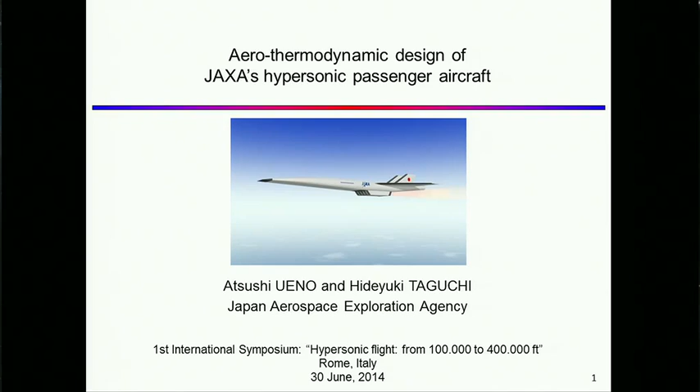Yes, thank you very much. Today I'd like to introduce the research activity at JAXA on hypersonic transport. In this presentation I will focus on aerothermodynamic design, and the Hikari project, a Europe-Japan collaboration, is briefly introduced.

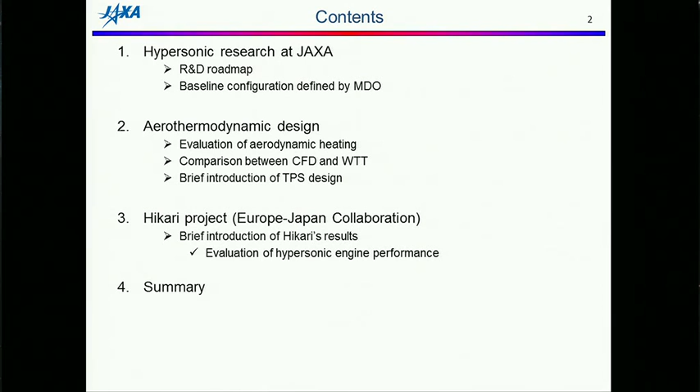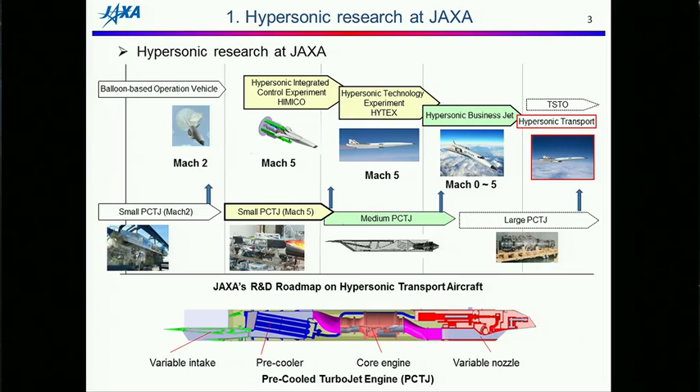After that, we are aiming at a hypersonic business jet using a medium-sized PCTJ, and finally we are aiming at a large-sized passenger aircraft. I will introduce this large-sized aircraft.

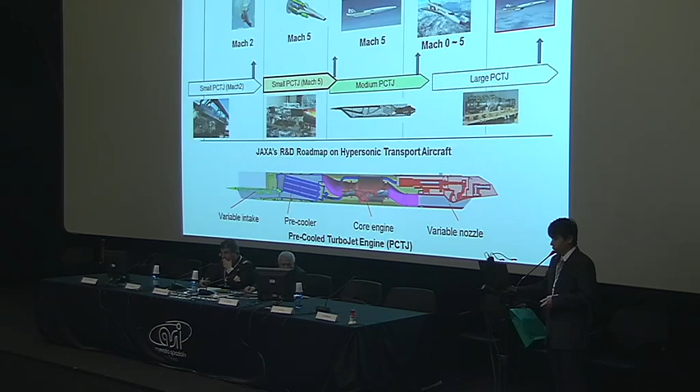The number of passengers is 100. Flight Mach number is 5 at an altitude of 25 kilometers. We are aiming at trans-Pacific flight from Tokyo to Los Angeles. It will take about 2 hours.

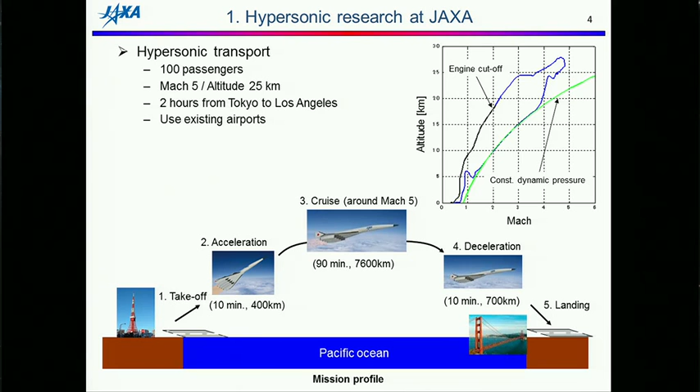Baseline configuration of our large-sized aircraft was defined using multidisciplinary design optimization. The aircraft shape and engine size were optimized considering mission requirements such as range performance and flight time. The optimized length is about 90 meters, and the weight is about 400 metric tons.

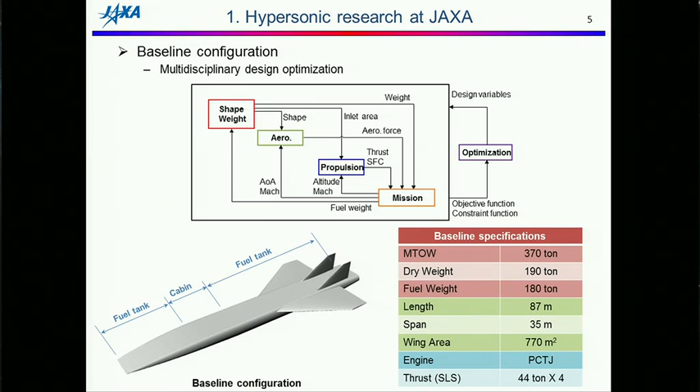We have 2 fuel tanks at the front and rear part of the fuselage in order to control the position of the center of gravity, and the cabin is placed at the center fuselage. For this baseline configuration, detailed aerothermodynamic design was conducted.

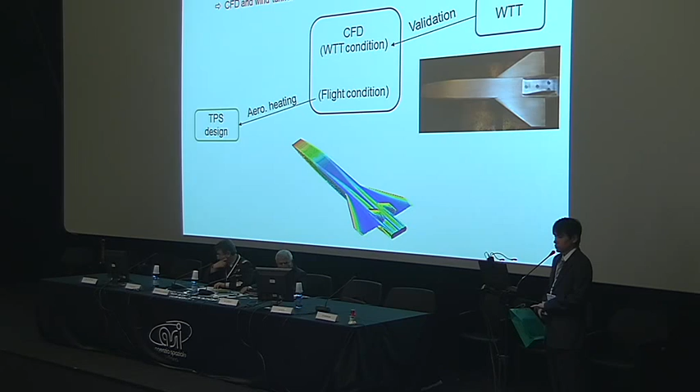In the MDO, aerodynamic heating was not taken into account, and the TPS weight was estimated using an empirical relation. Here, CFD analysis and wind tunnel tests were conducted to evaluate aerodynamic heating. In the wind tunnel test, it is difficult to realize flight condition because the Reynolds number is so large. So at first, CFD was validated by wind tunnel test, and after that, based on the CFD result at flight condition, the TPS was designed.

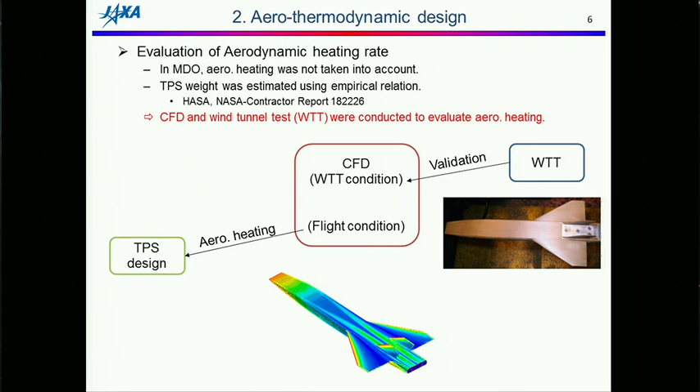The method of CFD analysis is shown here. JAXA's UPACS code was used, and the wall condition is isothermal wall. At wind tunnel condition, the wall temperature was set at around 300 Kelvin, considering the wall temperature of the wind tunnel model. At flight condition, the wall temperature was set at around 800 Kelvin, considering the usable temperature of the TPS material.

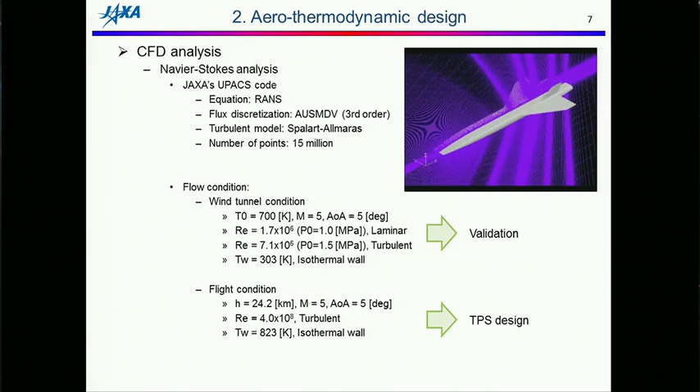The wind tunnel test was conducted at JAXA's hypersonic wind tunnel. The free stream Mach number is 5, the diameter of the test section is 0.5 meter, and the maximum duration is 120 seconds.

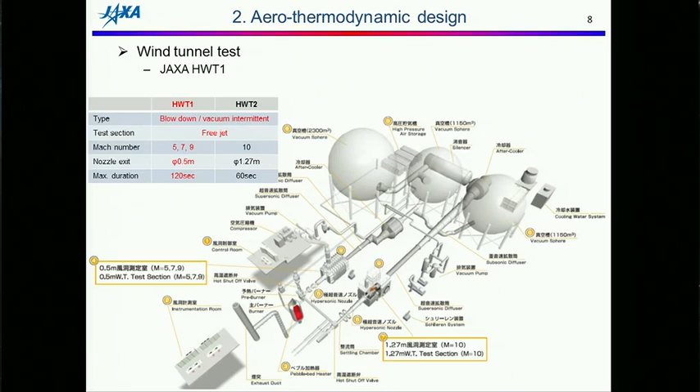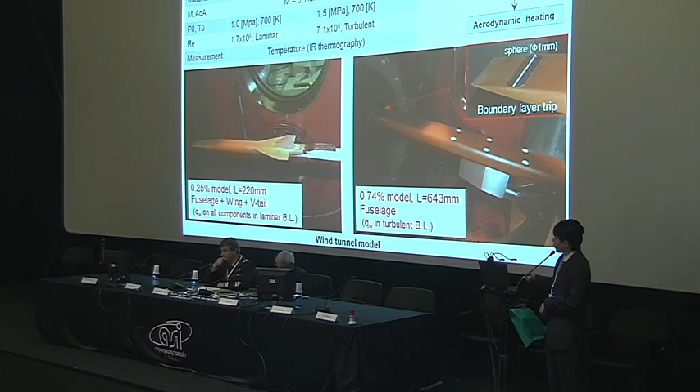We have 2 wind tunnel models. This smaller model is a full configuration model having a fuselage, wing, and vertical tail. The Reynolds number is less than the transition Reynolds number, and the boundary layer is laminar. But at flight condition, the boundary layer becomes turbulent, so we have to measure the aerodynamic heating for turbulent boundary layer.

So to increase the Reynolds number, in this large model the length is enlarged, and P0, the stagnation pressure, is increased from 1.0 to 1.5 megapascal. As a result, the Reynolds number becomes higher than the transition Reynolds number. In addition, in this model, a boundary layer trip was attached around the nose. In this test, the temperature was measured by infrared thermography, and assuming a semi-infinite one-dimensional heat equation, the aerodynamic heating was evaluated.

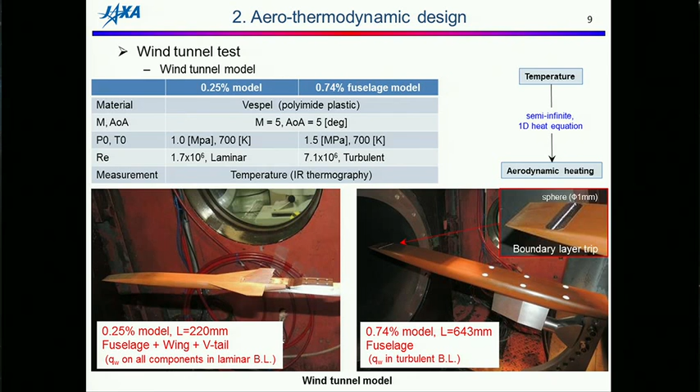This figure shows the result of a wind tunnel test for the smaller model. The boundary layer is laminar. The left figure shows the aerodynamic heating on the upper surface of the model.

Here we can see high aerodynamic heating. This is due to the vortex. The flow is separated at the side edge of the fuselage, and a vortex is generated on the upper surface of the model. This vortex thins the boundary layer thickness, so the aerodynamic heating is increased in the region where this vortex is attached.

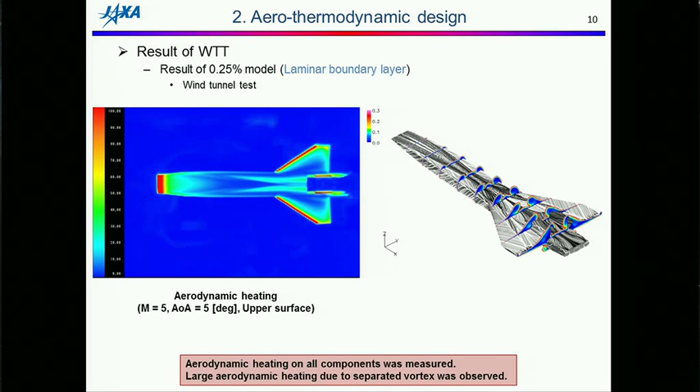This figure shows a comparison between CFD analysis and the wind tunnel test. They show a qualitative agreement. However, in the wind tunnel test, the aerodynamic heating is slightly overestimated around the nose and around the wing leading edge. This is due to the thickness of the wind tunnel model.

When the thickness of the wind tunnel model is small, it becomes difficult to distinguish between heating on the upper surface and heating on the lower surface. So this assumption, the semi-infinite one-dimensional heat equation, is not correct. So the aerodynamic heating is slightly overestimated in the region where the wind tunnel thickness is small. But CFD and wind tunnel test show a qualitative agreement.

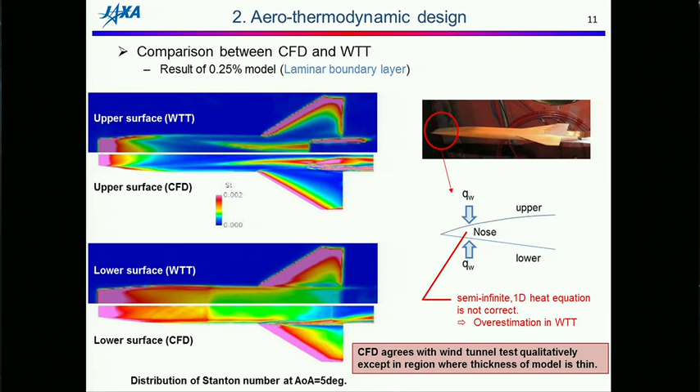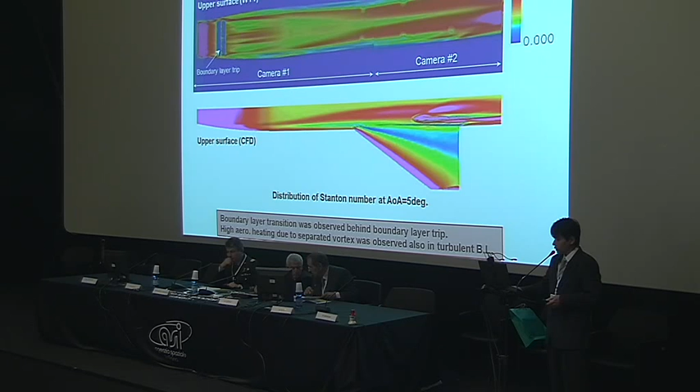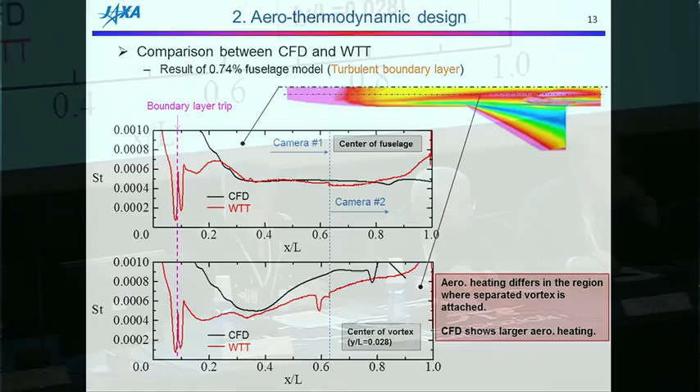In the region of the boundary layer trip, the boundary layer is laminar, and aerodynamic heating is lower than that of the CFD analysis. But behind the boundary layer trip, the boundary layer becomes turbulent, and aerodynamic heating shows good agreement with the CFD analysis.

However, along this line, CFD shows slightly larger aerodynamic heating. We think this is due to the vortex. From this figure, the vortex seems to be diffused more widely compared to that of CFD, and this difference in the diffusion of the vortex may affect the aerodynamic heating.

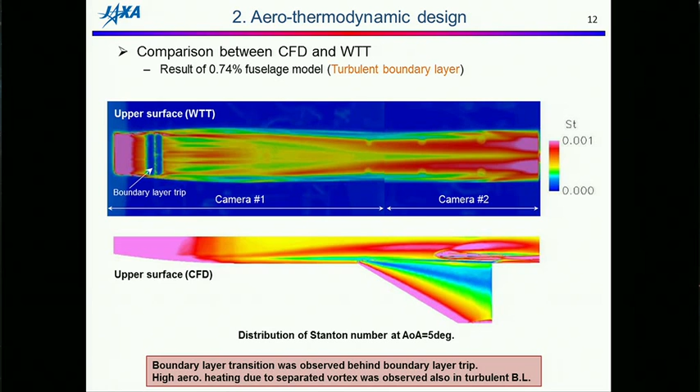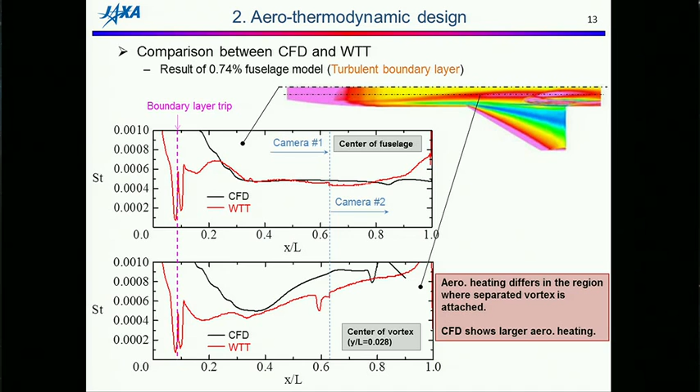From this figure, the aerodynamic heating is larger in the CFD analysis. So the TPS was designed based on the CFD result.

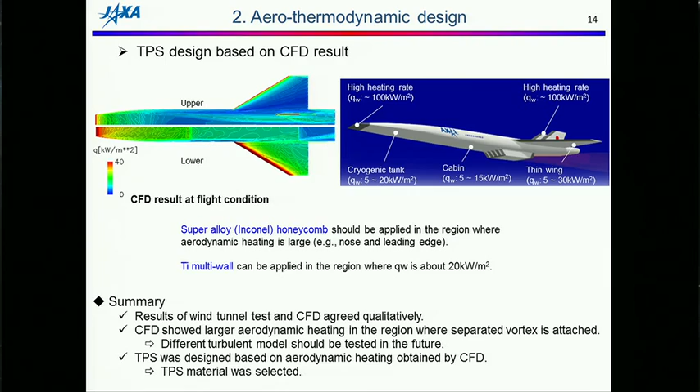In summary, the results of the wind tunnel test and CFD agreed qualitatively, and CFD showed larger aerodynamic heating. So different turbulence models should be tested in the future. TPS was designed based on aerodynamic heating obtained by CFD, and the TPS material was selected.

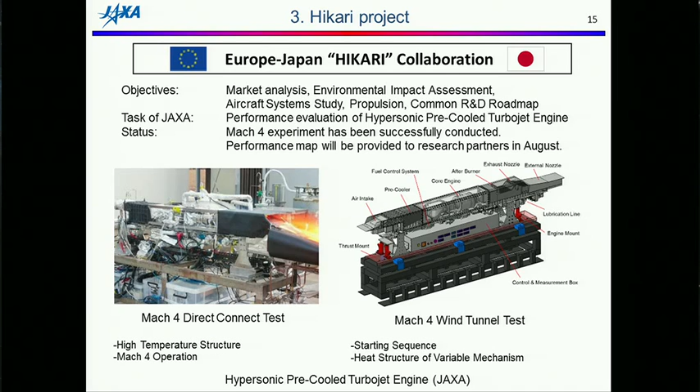In summary, we are planning an experimental vehicle with a small PCTJ flying at Mach 5. The budget is not secured yet, but we are trying to perform the flight test in the future.